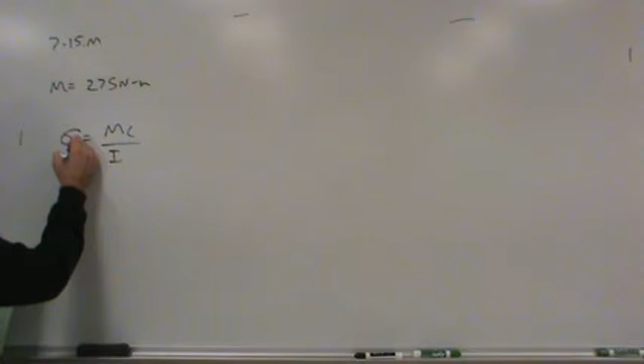the equation we've learned so far is that the stress is MC over I. In fact, this would be the maximum stress, would be the maximum bending stress. And we know that bending stress is a normal stress, okay? It's not something that's along the surface that we imagine being cut. It's a stress that's coming out from that surface. And so you can see the surface that's experiencing stress. Your author drew it for you.

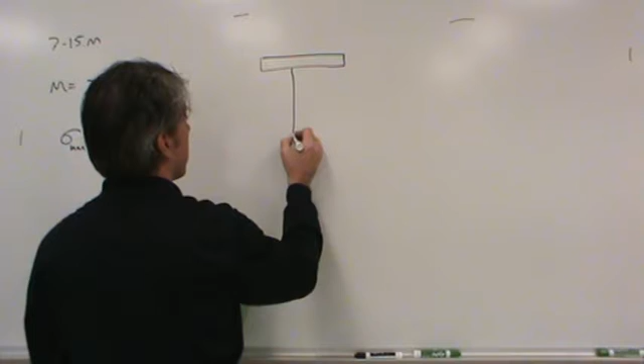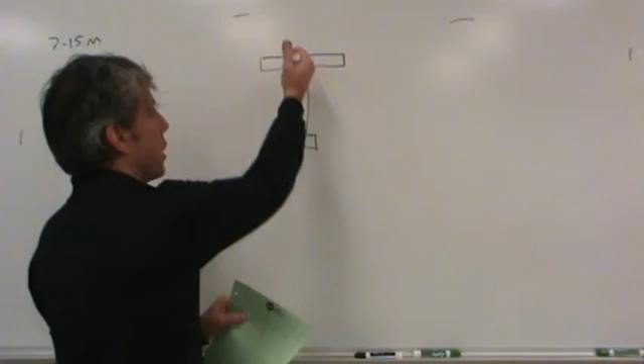It's this. Okay, and really we don't need those. This is all one solid beam by assumption, okay? So this is the surface that has little stress vectors coming off of it, right? Now, he didn't tell us whether the beam is bent up or bent down, so we don't know if the top or bottom is in tension or compression. We just know that there's a load everywhere.

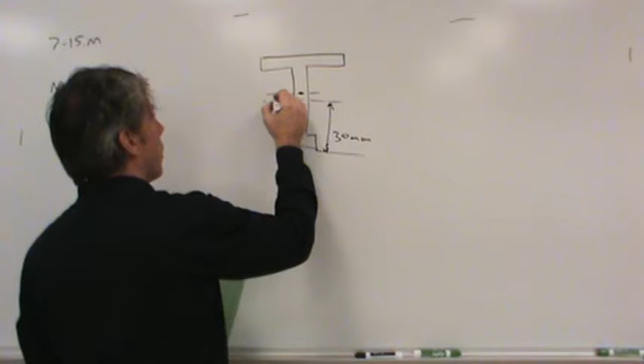We also know that since the center of the height, the 30 millimeters, is about here, our centroid is up here somewhere. If there's 30 millimeters there to the bottom, then what we're really interested in, this centroid, that's the 34 or so millimeters, if I can round it off. Okay. But where would the highest stress be?

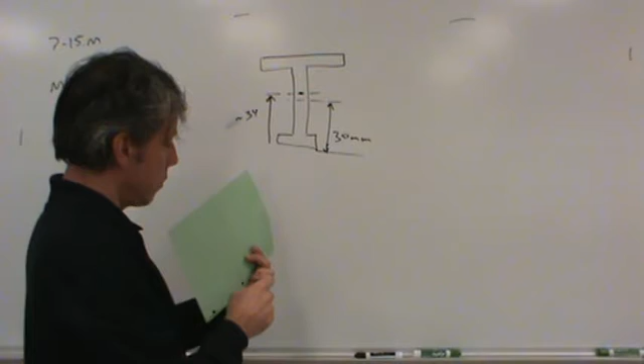Well, notice that the cross-section has this area moment of inertia. It's not like this point has a different moment of inertia than this point, right? Or anywhere in between. This is just the section property. So where are we going to find the maximum stress? Well, we have to be careful. It's not going to be at the top of the beam.

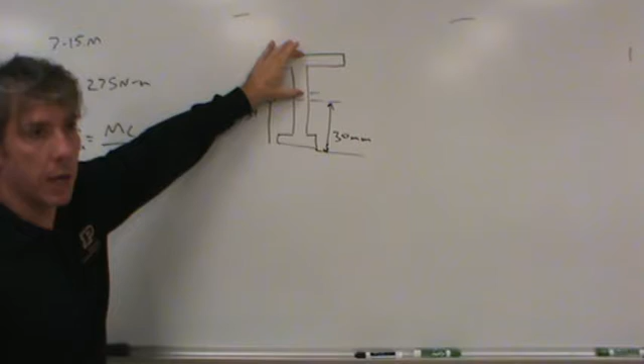Why? Because the distance from the centroid to the top of the beam is less than the distance from the centroid to the bottom. So there's a different stress at the top than the bottom. Okay? In fact, really what we want is the distance to the bottom in order to get the actual maximum stress. Does that make sense? So you have to be kind of careful as you're going along.

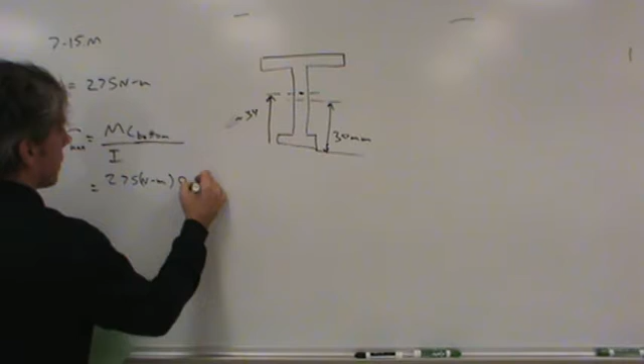Anyway, so we know the magnitude of the moment. Okay, we know the distance to the bottom. In fact, that's the 34 or so millimeters. Okay, this Y bar here. So I'll write it in with a little more precision, and I'm going to be careful. 0.03, let's see, how many did I take? I took 3, 8, 6, and I quit at that point. Now that's meters, okay? Because I want to make sure that my units are consistent.

Now in the denominator, the number in the spreadsheet is 272,935.6, and you agreed with me that that was millimeters to the fourth. How would I convert that to meters to the fourth? What would you do? Divide by 1,000 four times, right? Here's another way of writing that. There's 1 meter per 1,000 millimeters. But that's not enough. I need 4 of them. So let's raise this to the 4th power. Does everybody see how the millimeters will cancel?

I know units are one thing that all of my thermo classes struggle with, and I pound it into them anyway. I'll do the same thing with you guys. Units are really important. So the millimeters to the 4th power will cancel. What am I left with in the denominator in terms of units? Meters to the 4th power. Not meters, meters to the 4th power. Because this 4 acts on the 1 and the 1,000 the same way it acts on the meter and the millimeter. All right.

So now our units are consistent. In fact, what would the units be? We'd have meters squared in the numerator as far as the length portion is concerned, forgetting the newtons for a moment. Length squared in the numerator, length to the 4th in the denominator. So what would the units be? Newtons per meter squared. A Newton per meter squared is a? Few people know it as a Pascal. It's a force per area. And so the units we have here are pascals.

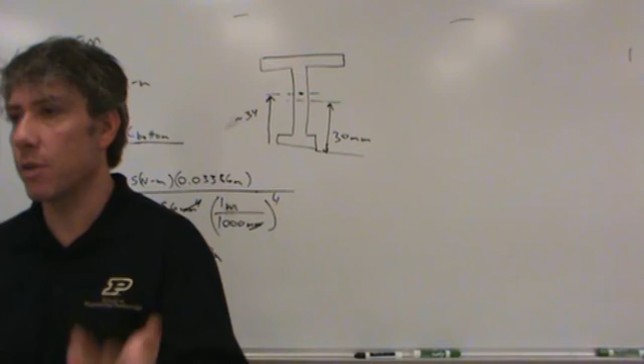So table 7-1, page 368, the recommendation is that if you have a repeated load, then the design stress that you should allow the material to experience should only be 1/8 of the ultimate strength of the material. I don't know how to say this very well; I can understand it, I just don't know how to describe it well. When you're looking at how materials fail, the strength in fatigue correlates better with the ultimate strength than it does with the yield strength. Does that make sense?

Now, it's not a one-to-one comparison. There's a lot more to fatigue. I think that's why I'm struggling to talk about it. This is an extremely simplified way of looking at fatigue. But the point is that the strength of the material to resist fatigue depends more on its ultimate strength than it does its yield strength.

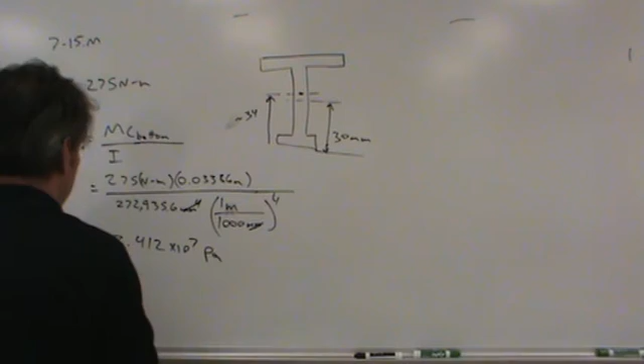So go to the back of your book. We're supposed to find an aluminum that will take this load. The page I want is 718, table A18. And by the way, this number is 34 or so megapascals. A little more, but for right now, that's fine. Okay. So if we look, you can say, well, pretty much any aluminum would take 34 megapascals. Yeah, but there's that safety factor or that fatigue factor. Back on page 368, we're only supposed to use 1/8 of the ultimate strength.

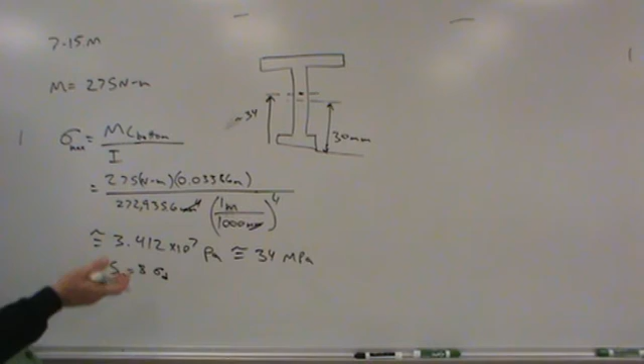Well, that makes things a little more difficult because that means we need to go and look at all these ultimate strengths, divide them all by 8, and then compare them to 34 megapascals. Does that make sense? I would much rather take the 8 and multiply it by the stress so that I could just go and compare. So 34 or so times 8. When I did that, I got about 273 megapascals. Here's what I did. I said the ultimate strength should be 8 times the design strength, just rearranging what was in the table. And so this comes out to about 273 megapascals.

Well, now there are several aluminums that carry this load, but not all of them. In fact, the one that I chose was 6061 T6, which has an ultimate strength of 310 megapascals. You wouldn't have to. You could choose something with a higher strength, even twice that strength if you want. It doesn't matter. The point is, this is the minimum recommendation. This is the minimum ultimate strength that the material would have to have in order to resist this load. Does that make sense? Any questions on that? Okay.

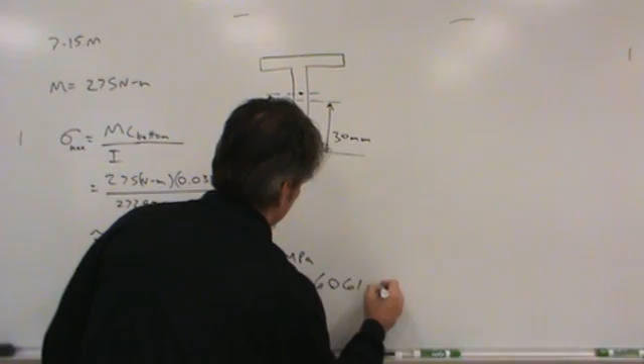So to finish this off for the sake of the video, I chose 6061 T6, and it has an ultimate strength of 310 megapascals, so we should be able to take this load without too much trouble. Okay.